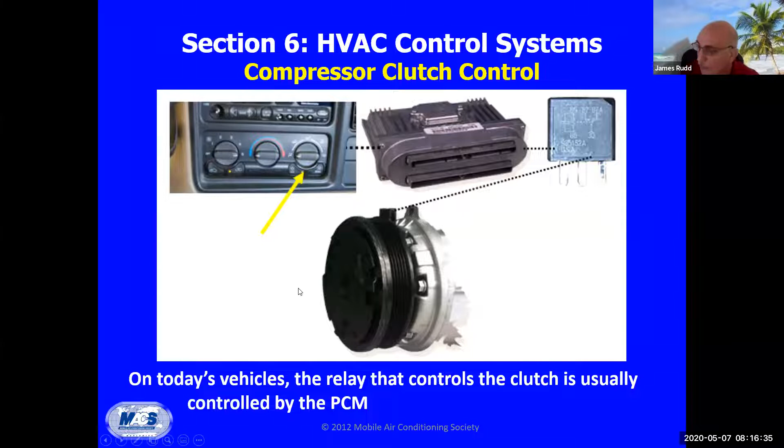There are two primary methods of maintaining evaporator temperature to prevent freezing. If we allow that compressor to stay on without any kind of control, it will actually turn into a block of ice, and this is not what we want. We want to be able to blow air across it. So we do it a couple different ways. We either use a cycling system where we actually turn the compressor on and off.

It gets down to, on the low side, somewhere around 28, maybe 26 PSI. If you think about it, we get down to 30, we start forming ice. So we kind of bring it down to that, and then we turn the compressor off. So we cycle it off.

Or some of the compressors are what they call a variable displacement. We can change the pitch of the actual piston inside the compressor, and we can go to a neutral position or change the actual displacement of that and make it happen. All right.

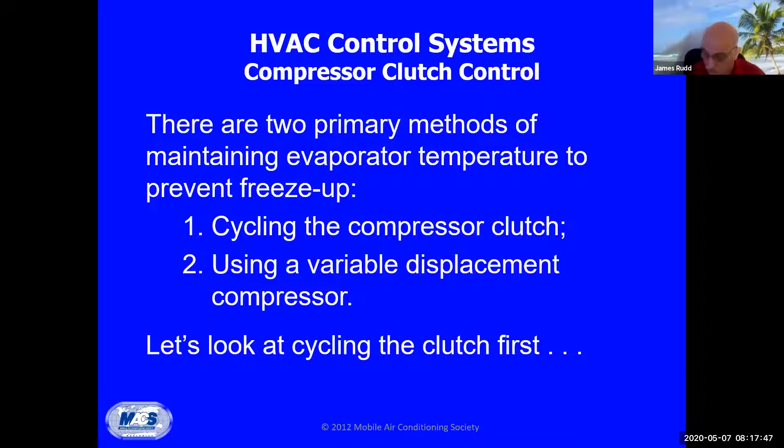This is a thermistor, and it's very similar to what we use in our air temperature in our engine performance, and also our coolant temperatures. We use a lot of the same type of sensors to do that. This information is all put into the PCM to actually control and make sure it doesn't form ice or get too cool. So this is just like some of the controls that we actually use.

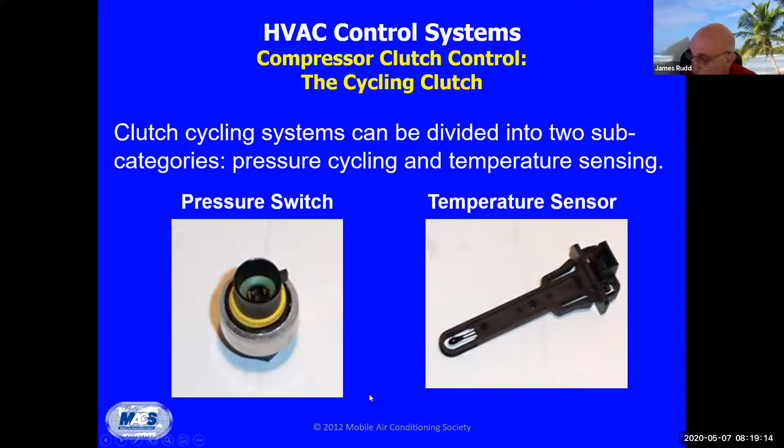So it has, of course, power going into the control module, and then we'll have a high pressure switch, which will turn the compressor off when it gets too high of temperature, too high of pressure. Again, it's in relationship with pressure and temperature. So if that high pressure switch had actually cut off, I'm looking for possible overcharging, which could happen, but also I'm looking for fan controls, airflow not coming across to take the heat off.

If it gets too high, some of the bleed-offs, a pressure control too, will actually vent the refrigerant to atmosphere to protect that system also. We can start blowing off hoses, we can start damaging compressors. So this is all taken into consideration, trying to protect the system.

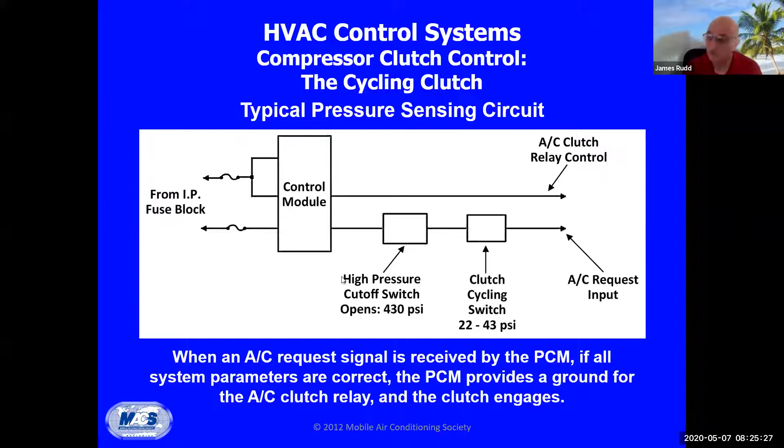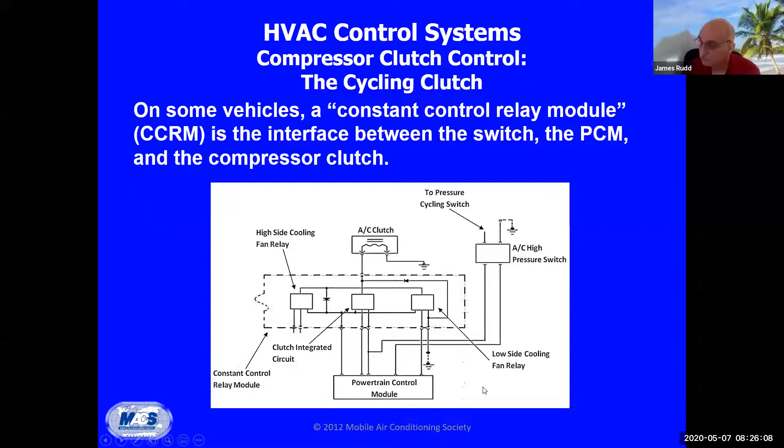You can use a voltmeter to go in and see if things are going, but really you need to find out what the computer is seeing, and this is where a scan tool comes in play. Before, in air conditioning, we never used the scan tool. It was just a matter of controls and switches, and we would take our voltmeter and check the different circuits, and we knew what needed to be where. Now you really do need to see from the computer standpoint what kind of information is being shared and what is going on.

So you really want to look for the pressure sensors and also the command. And this comes to a good point too. If you are not getting a request coming in to the module, that might be a control head problem. So this is something that the only way you can really get is through an actual scan tool.

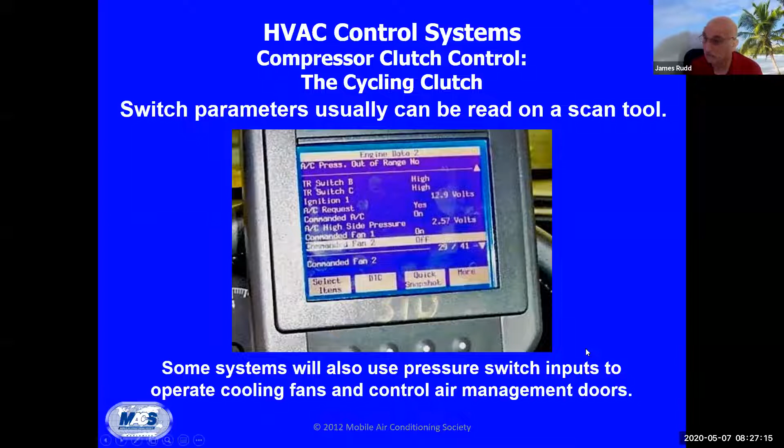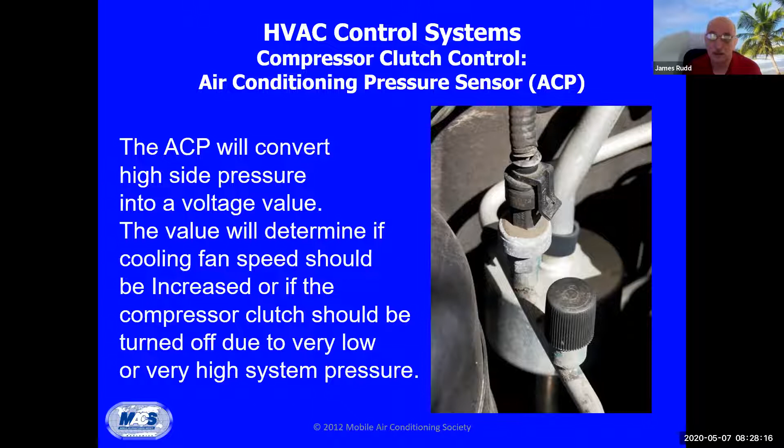So again, it comes down to if it gets too high of pressure. The switches will be different for the cycling one versus the high pressure one. It will send information back to the module to make sure that it is controlling that compressor more finely.

This is actually a different type of switch. It looks very familiar, to me at least, and this helps with controlling the actual information, so we can actually turn on the cooling fans, energize the fans and pulse the fans. And it used to be we just sent ground and power to the fan.

Let me let somebody in here.

All right, and it let voltage onto the fan, and we would have power and ground, and it would go on full tilt. Now we're actually pulsing or modulating the fan control. So we'll give the fan a certain duty cycle to where it'll come on to a certain speed. And then if we really need a lot of fan, we'll turn it on even faster. So we're actually changing not just so much voltage, we're actually allowing so much of the fan to come on.

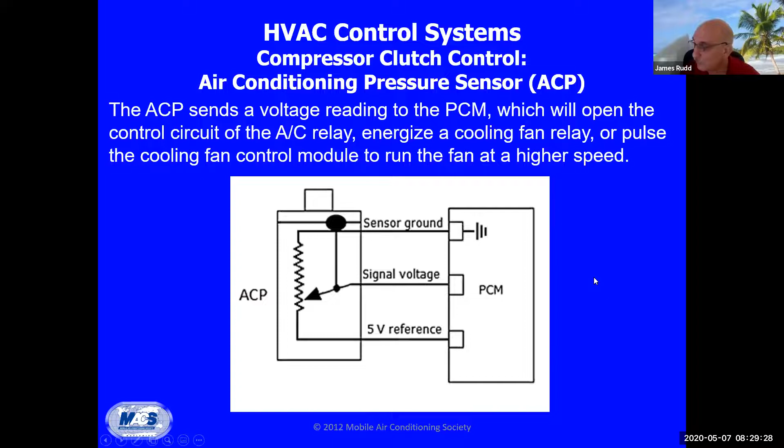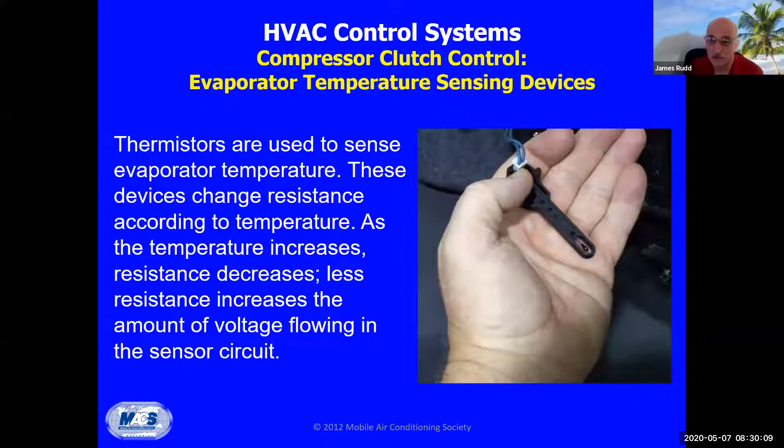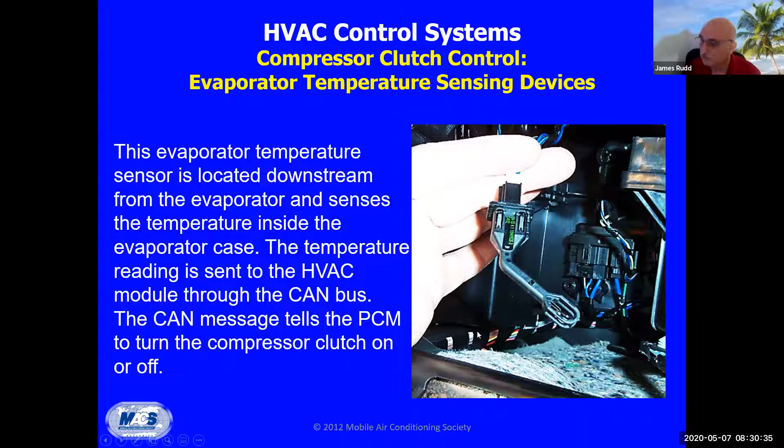Here's another sensor that actually is a little bit different design. You're going to see CAN and CAN bus; again, this has to do with sharing information between the different modules. And this is one of the types of sensors that are in there. This is again showing the sensing devices and how they're actually wired in, and how they actually are placed.

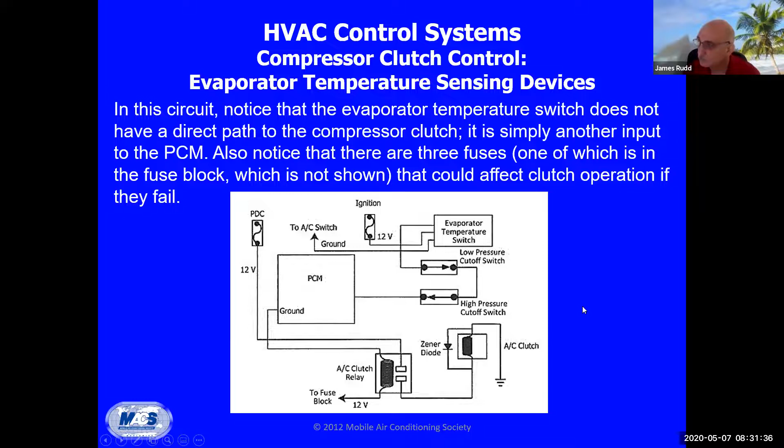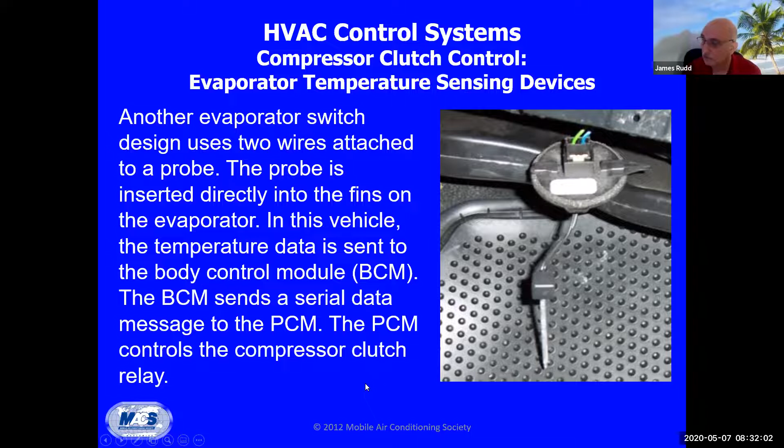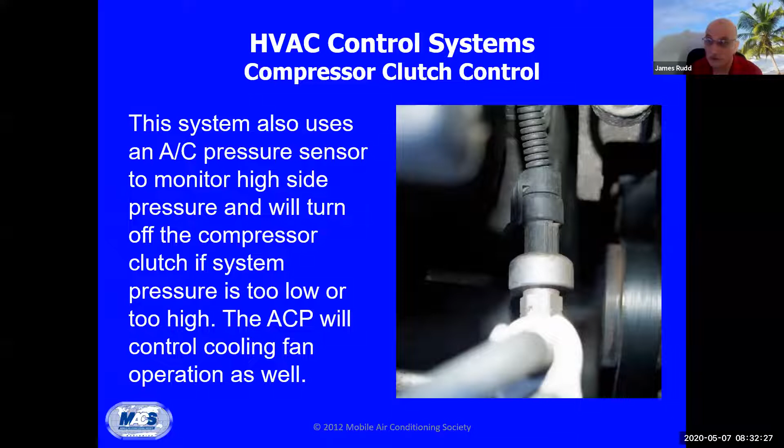Pressure switch: this one monitors the high pressure, and if it gets too low, it's going to help with it. If it gets too high, it's going to be part of the fan control also. Not just sending information back to the computer or the module to tell it, hey, we're getting too hot, or we're okay. It might even be part of the fan control.

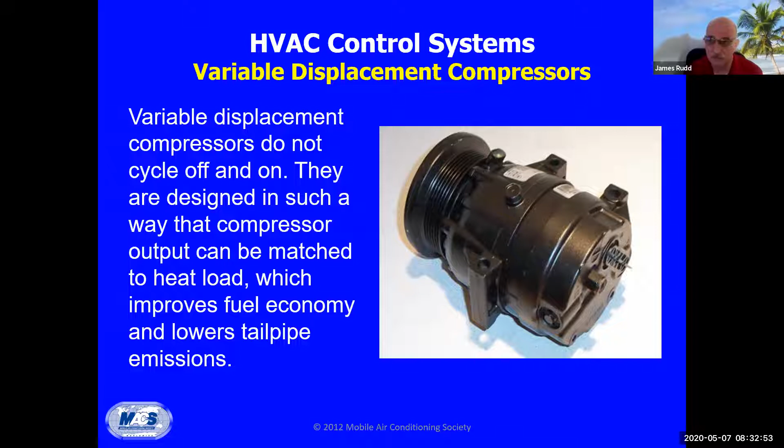Compressors, variable displacement: like I said earlier, we can leave the compressor on all the time. We just change the pitch of the actual piston profile, and we can either go for a deep stroke, or we can neutral it out, where there's really no refrigerant being transferred around.

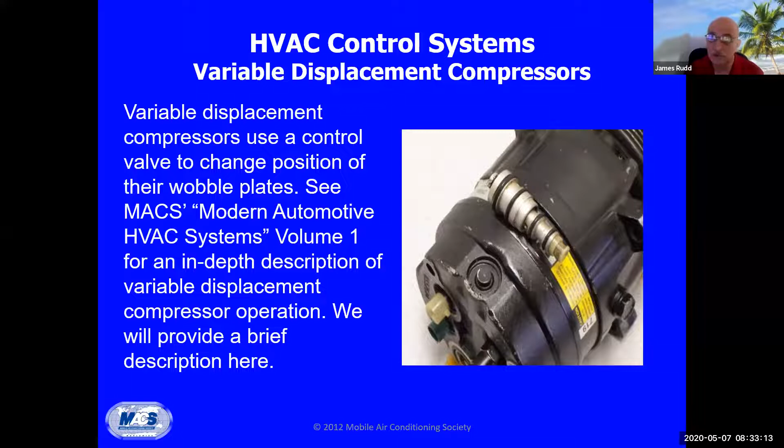And you're going to notice, and I'll have a picture in here, that the device you see up here is the control. That's actually what's allowing the wobble plate to displace different profiles. Here's that valve, and it's almost like an engine setup, but by changing the feed, we can cause it to change that profile. We'll move that profile around.

The control valve senses pressure on the suction or low pressure side of the system. As the evaporator pressure temperature increases, low side pressure increases. The control valve will direct system low pressure into the compressor crankcase. The compressor internal cylinder pressure will now be greater than the compressor crankcase pressure. This causes the compressor to increase piston stroke with increased compressor output.

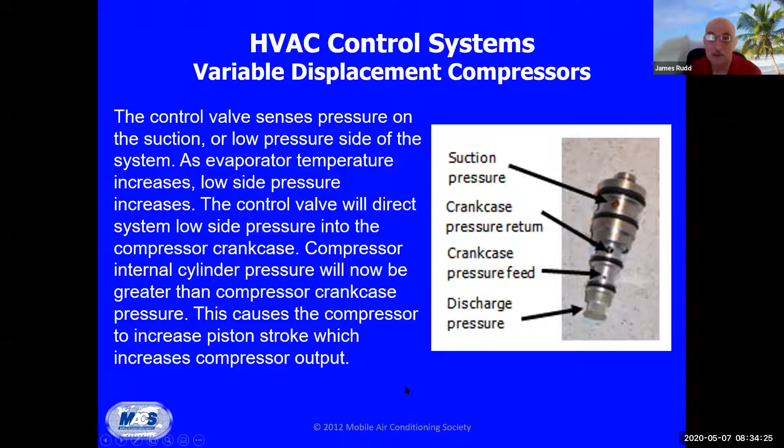This is a serviceable piece. Not many people know about it, and this is what gets misdiagnosed sometimes too. As the evaporator cools down, system low pressure drops, and the bellows and the control valve now bleed high side pressure into the compressor crankcase. Crankcase pressure is now greater than the compressor cylinder pressure, which reduces the piston stroke and the compressor output.

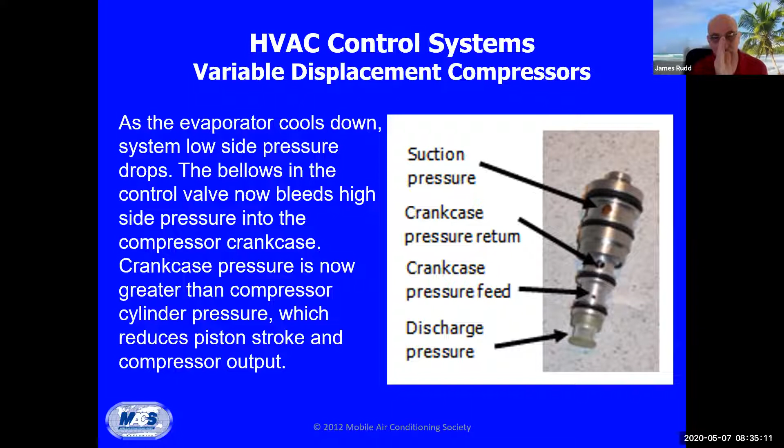So it changes the profile. Instead of being really aggressive, it almost flattens out, and it'll change depending on the pressure as it goes across. So you may have a really aggressive stroke when there's an imbalance, or if the pressures equalize, you're going to get almost a flat stroke. And this is just the valve itself showing you how it's put together and what it does. And this is that compressor feed.

That's very important. In the field, whenever I start seeing issues with these, of course they're a mechanical device internally, with a bunch of springs and stuff like that. If you're crazy like me, you take them apart. But what I have found is contaminants. Your customers might not understand this, but there's some education we need to do with our customers: this does need to be serviced, I would say a minimum once a year, just to check the refrigerant levels, and it's also a good time to clean it out a little bit.

That refrigerant oil is just like engine oil. It needs to be serviced. Does it need to be serviced every 3 months? No. But it does need to be looked at, and it can have properties that break down inside of it. The other thing is, like any oil, it collects debris, possibly from hoses starting to break down. In some of the older vehicles, the walls of the hoses tend to disintegrate, and then this debris gets collected through the whole system. Plus, the compressor is a mechanical device, and it needs to be serviced, and this is where the oil comes in play.

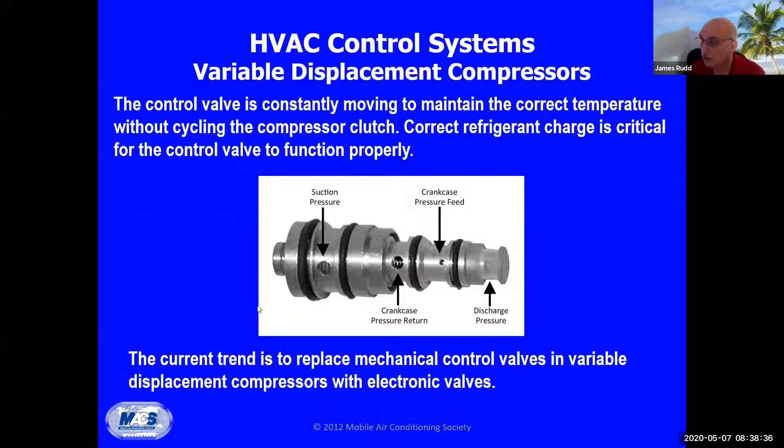Okay. All right, so this is a control valve, like I said earlier. This is actually the variable displacement compressor. Internally, it's different. It's not like the old style compressors. And this is just kind of a cutaway of what one looks like. It doesn't have a clutch to it.

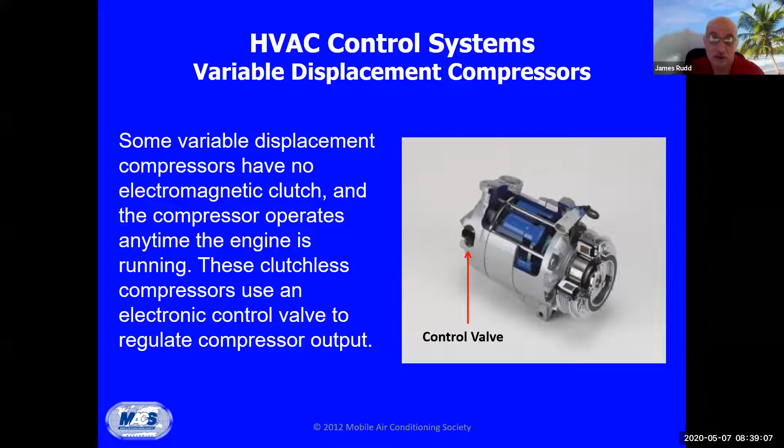It just has a drive belt, and it will change its pitch instead of cycling. It doesn't cycle. It just stays on all the time. We just change the pitch of the piston. And that's pretty much on that end of it, with the controls and like that.

I want to kind of stop for a second here and ask if there's any questions on that. This is just really going into the control side for the compressor. What I want to do is, because some of your actual final exam is going to be talking about airflow, and not just on the outside, but also in the internals of the passenger compartment, I wanted to go over a little bit of that before we close up today's class.

So go ahead if there's anybody that has any questions. I mean, it kind of hit you hard with it, and we're going to be going a little more over the controls as we go through the semester. So any questions so far? Okay, I take that as no questions.

So what I want to do is continue on, and we're going into section 7 of this presentation that MACS has put together. This is going back over the blower motors and talking about the importance of circulating air through the passenger compartment to make things work. Because as we know, heat is attracted to cold.

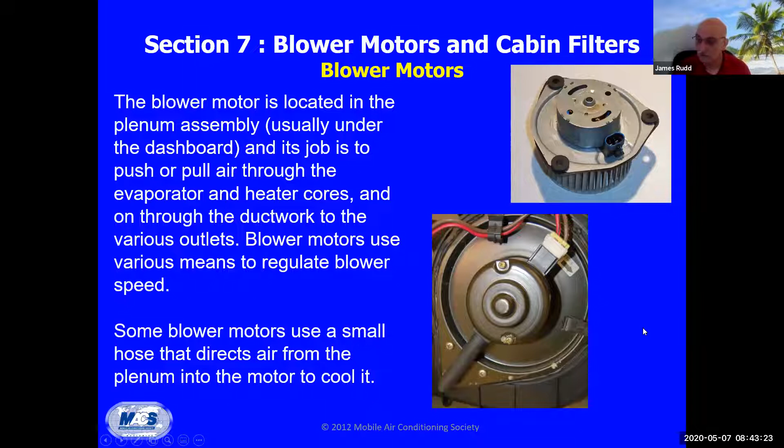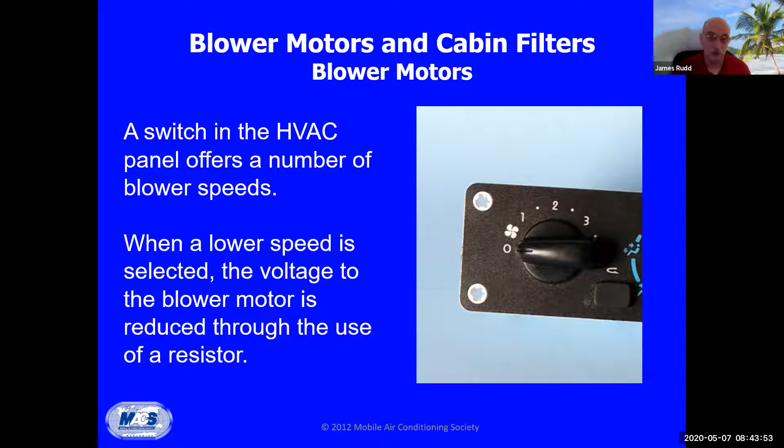So it's very important that you put that hose back on. Now, this is the old style. We had a panel with a position switch, and you see these different positions, and it shows the little blower motor here, and it says 1, 2, and 3, and they probably have a high on the end right here. So this would give you the lower speeds, and then it would be a direct either off the blower relay straight on to an exact 12 volt and enough amperage to actually spin that blower the fastest speed.

We do use blower motor relays, and like I said before, we may switch this over to high speed using the blower motor relay. And again, I'm gonna harp on this a little bit, but make sure you put the correct relay in. There are relays that have diodes in them, and there are relays that have resistors in them, and there's relays that do not have either one in it. They're there for some specific function, and make sure if you're doing some swapping, it's very common for technicians to swap relays, that you do it right. Do it 1 for 1, in other words, the right one goes in there, and you could have ill effects if you don't.

If you're testing that relay, I shared with you on Tuesday about testing relays, and one of the things I recommended was using a test light to energize. That's it. All I'm doing is using it to energize. And if you don't remember that, we had a video of that I actually posted for you too. But make sure that you test it correctly. Don't just directly connect a set of jumper leads from the battery to the actual relay. You could damage that diode or that resistor that's in place.

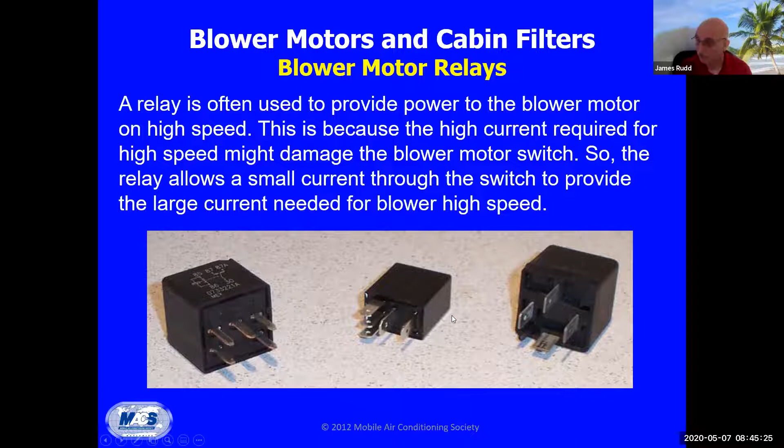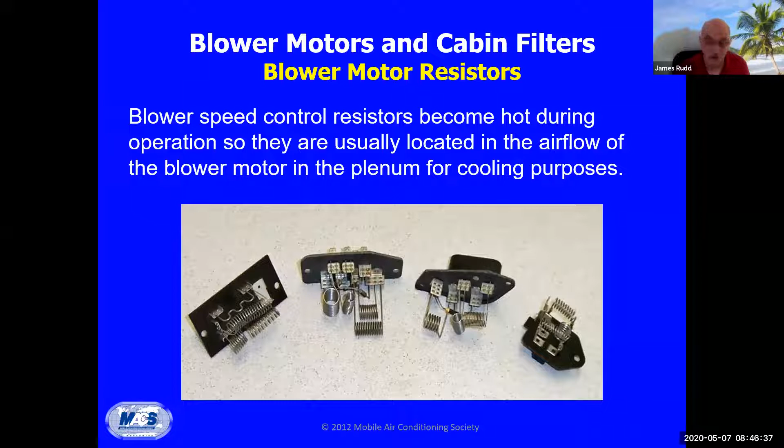Do not run these out of the airflow. They will get destroyed. I mean, young, dumb, and trying to figure out how things work. Me, I always take things apart. I turned one on one time, and it's kind of interesting to see this happen, but this actual coil wiring right here, that resistor right there actually glows. It gets very, very hot, very, very quick, and it melts down. So I actually destroyed one of the resistors, just wanted to see how it worked like that. So take it from me, don't do it.

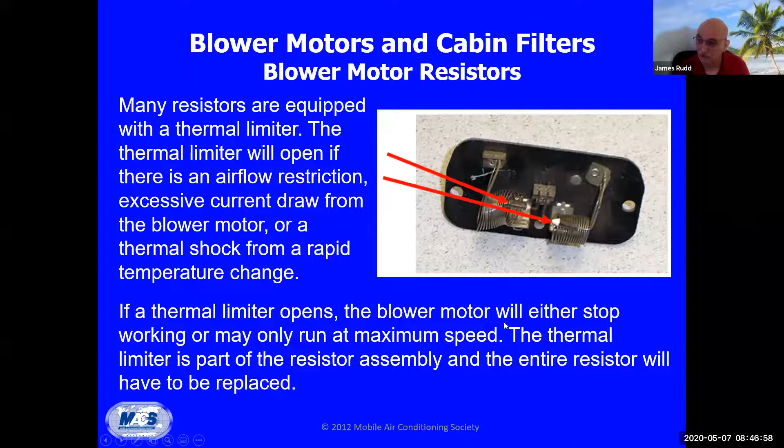And here it actually shows a little bit of it. So many resistors are equipped with a thermal limiter. The thermal limiter will open if there is an airflow restriction. And this kind of protects little guys like that. And then we go into what they call the credit card size ones. And this is going into more of the resistor, variable resistor designs.

And Zeus, you good? Okay, I heard the fan. I thought maybe there was a question coming up.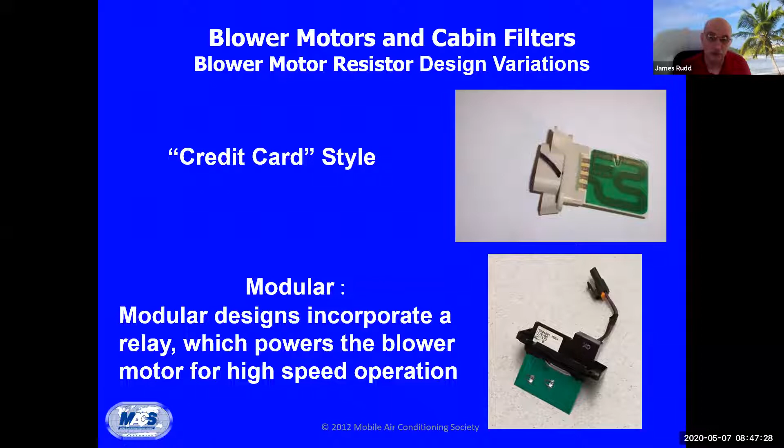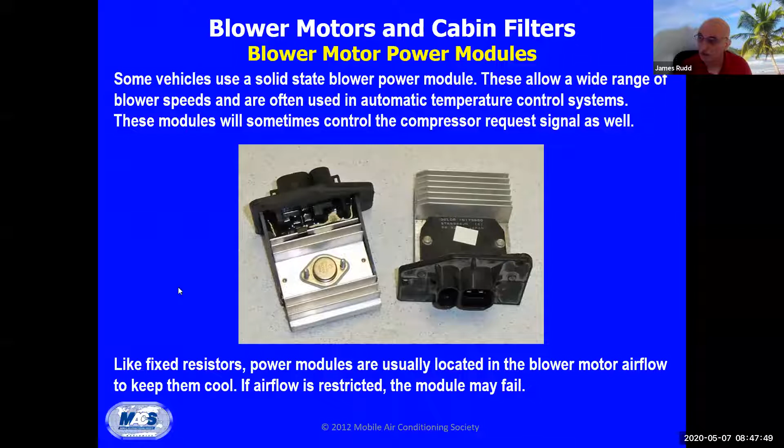So these are more of the modular designs, and sometimes they call them credit cards and stuff like that. And this is what, for the blower motor, instead of doing the old coil type resistors, they're actually using resistor boards to do them. Then we go into the power modules. This is where they're going to be cycling or modulating. This is going to be communication from the actual module, and this will be feedback coming back and forth. And you notice the big resistor. There needs to be a cooling board or a cooling fan.

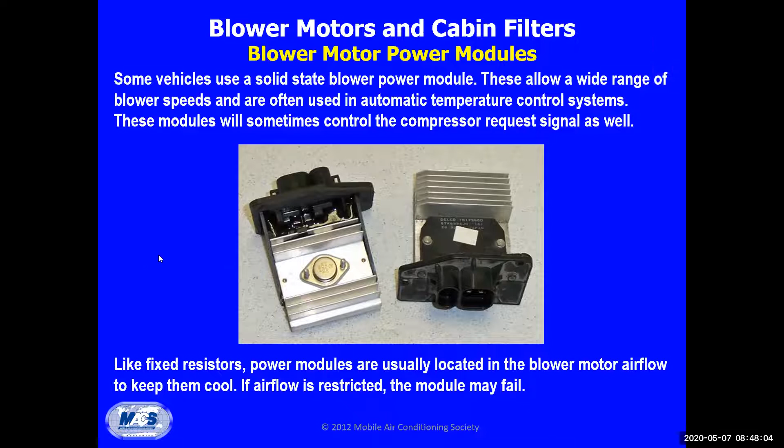Okay, so this is a brushless blower motor. Many vehicle manufacturers have started using brushless blower motors that use pulse width modulation to operate the blower motor. The brushless blower motors use magnets and transistors that are pulsed in sequence. When the like poles of the magnet are lined up, they repel each other, causing the blower motor to turn. It's kind of back to your magnetism principles when we were in electrical class. Both of the power module control and the brushless motor designs are controlled by a pulse width.

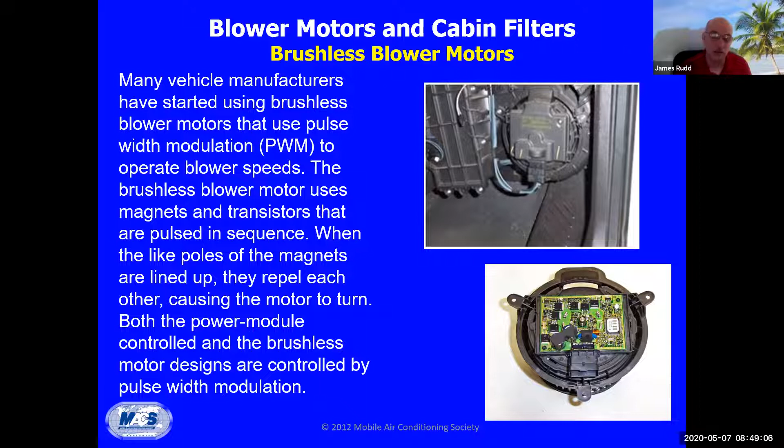In other words, we're not just turning on and off, we're actually modulating the current going into that motor to make it work and make it spin. And this is a typical screen. And this is where, if you wanted to, and we can do it, is take a lab scope and see what kind of a pulse width, and depending on how much blower motor is needed, or the speed, we pulse the actual voltage on and off.

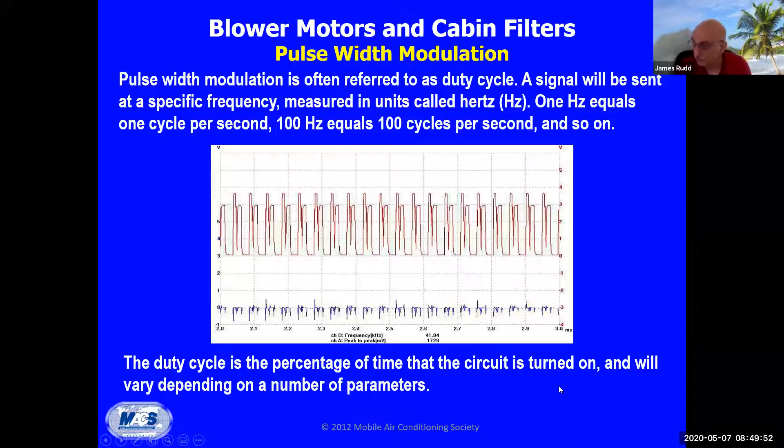So you'll notice this is up to, I think it's up to, let's see, 6 volts. Maybe we got a little bit more up here. And we look at how much time we're pulsing on, almost like a fuel injector. And this is actually checking the blower motor for duty cycle.

So you can set your DVOM up to voltage, and usually you're using AC voltage, and you'll watch how much current is actually being pulsed. It's almost like the screen we've seen before, but now we're just putting it to a duty cycle type.

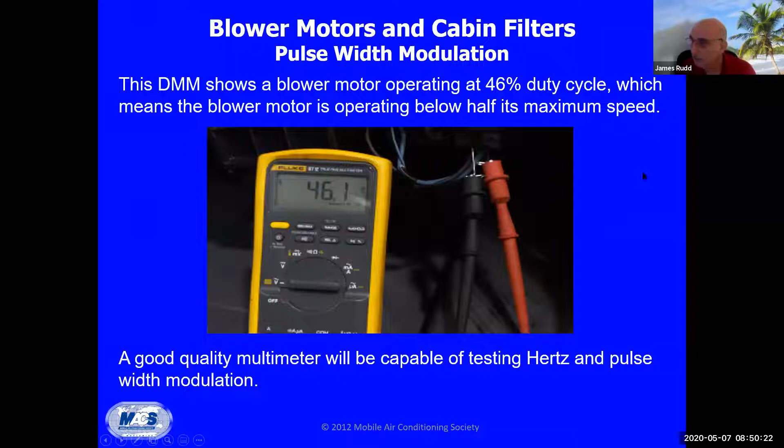And then, this one here is actually pulse width modulated. Again, we're looking at it in hertz, how much time from 0 to 100% of the actual duty cycle. So we're actually very, very high on this one here.

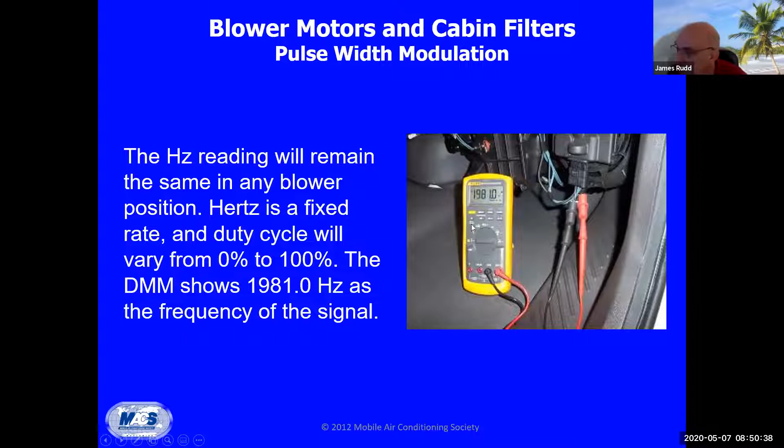Poor grounds can lead to motor failures and can be a source of noise on the radio too. Old radio way of looking at things. Loose or dirty connections can lead to motor and power module failures. Check the blower motor wheel. Sometimes we call them the squirrel cage.

And if they have cracks in them, and I shouldn't say may, you will find on occasion where customers have things up on their dash and things fall down inside, and the squirrel cage or blower wheel is plastic, and it will get in there and you'll have the wheel fracture and crack. And they'll cause a lot of noise.

And if a piece dislodges, it can actually bind up in the ducting, and you may have it freeze up that blower wheel too. I've found pencils and pens and Disneyland tickets and all kinds of stuff down inside of them.

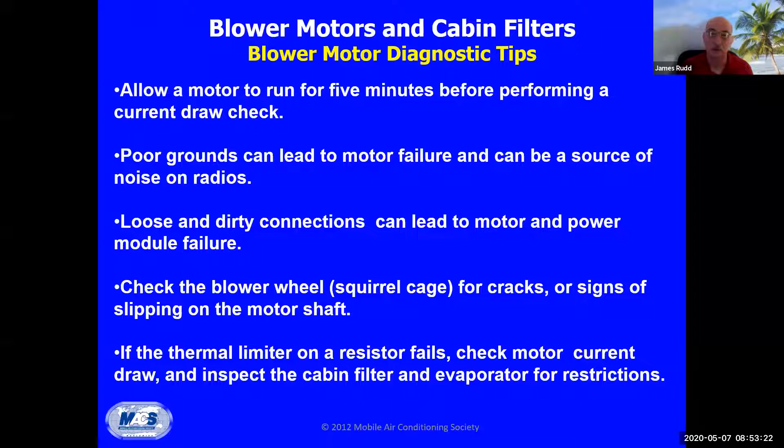And it can cause that thermal limiter to pop, and it can cause a higher draw, and it can go to the point where it actually pops fuses and possibly starts melting some wires too. You usually see it right on the connector where you get that black and melting of the plastic. So, cabin filters, the purpose of course is to remove dust, pollen, and odor-causing matter.

And for years, we've been just taking road dirt and running it through the ducting system. And honestly, after a few years, we would actually have to take the ducting out of the car and clean it all out because there would be so much contaminants depending on where people were.

And if you get in a real dusty desert area, you may have quite a bit of debris inside, and if enough gets packed up against the evaporator or the heater core, then you don't have that transfer of heat. It will coat it, and we would have to take them out and run a garden hose through the whole ducting just to get it cleaned out so we could put it back together.

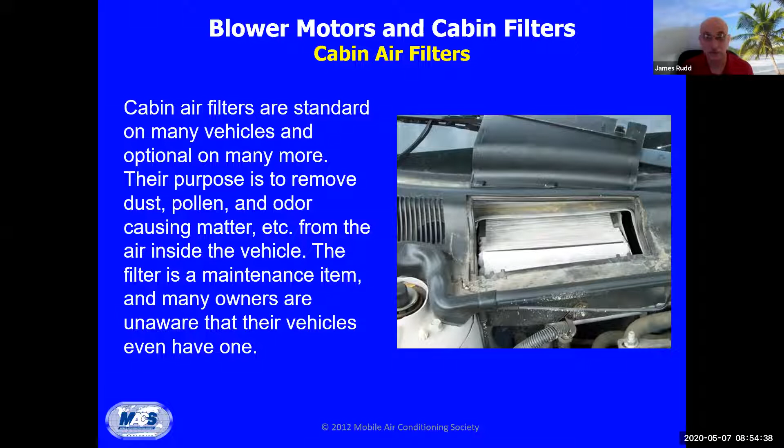So adding in the actual filters was a great part. We don't get the contaminants through it. It keeps it cleaner, and then we don't have to breathe in the other part too. So that was the health part of it too. This is just, again, showing the filter, and it can cause restriction.

This is another component that we need to check during our normal checks. And this doesn't just have to be the AC check. It can be your normal inspections on the vehicle when you're bringing them in for oil changes or whatever. But this is one of the things I do check, especially when I have a customer complaining that it doesn't seem like it's getting very cold.

And I'll go out to the car and I'll just put my hand up against the actual vent, and there's no airflow. Okay, so then one of the things I do is I go find where the filter is, and I pop it out and I inspect it to make sure it's not plugged up, restricting things. And there's been many a time that I've done it.

And actually, a really good friend of mine was complaining that it's not getting cold. And I went up and visited, and she says, it's slowly but surely not getting cold. I don't know, maybe it needs some Freon. And I said, well, let me look at it. And this was a little Hyundai, and this one was actually right at the glove box.

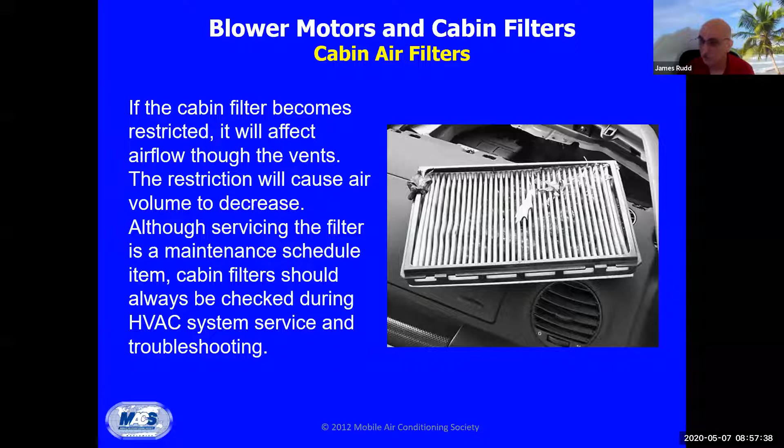or they would have vermin actually living in certain parts of the car. And one of the places they really liked to put their nests was in the ducting of the air conditioning areas and stuff like that. So just some things that I've actually experienced along the way.